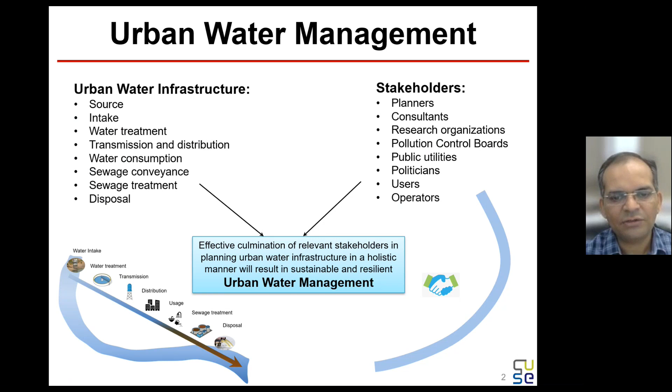Effective culmination of relevant stakeholders in planning urban water infrastructure in a holistic manner will result in sustainable and resilient urban water management. Because today we need both aspects of sustainability, which encompasses economic feasibility, technical feasibility, environmental feasibility, and also social aspects - that forms the sustainability basis. And then we also need systems which are resilient, which will cater to the emerging challenges posed by climate change.

If you see the current status of sewage generation and treatment in India, some states are doing good on sewage treatment, but their generation of sewage is also very high. For example, in Maharashtra, you can see it is having around 9,000 million liters per day sewage generation, but treatment is around about 7,000 million liters per day.

Whereas some states, because of the topography and current settings, such as Kerala, sewage generation is there, but treatment capacity is very minimal. Also in West Bengal, Tamil Nadu - these are the states which will be catching up with the sewage treatment systems.

In India, on average, we have about 44% sewage treatment capacity, which is based on the recent data issued by the Ministry of Environment, Forest and Climate Change.

We have the challenge of sewage generated, and we have to create treatment facilities. Now time has come to think of these not just as treatment facilities, but as new sources of water. Our treatment facility should also be providing some kind of water for secondary purposes, at least to start with. Then we have the industrial wastewater problem, which can be tackled separately or in an integrated manner in common effluent treatment plants. So overall, the sewage and industrial treatment is a challenge in India currently.

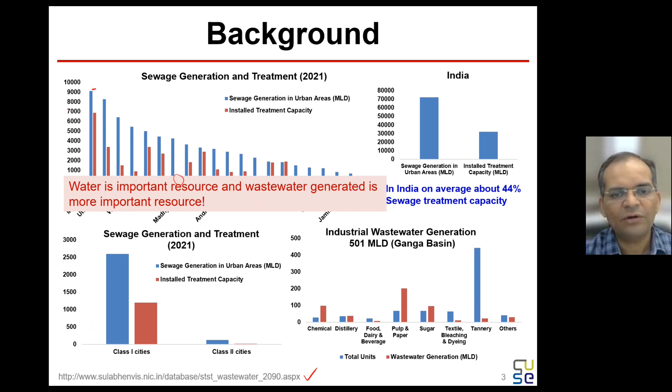We have been studying water as an important resource, but currently, wastewater generated is a more important resource because of the carbon, nitrogen, phosphorus available in this wastewater. So we'll see in this talk how these are very important. These are the approaches for wastewater management.

If you talk about how we can move from that generated sewage scenario to creating this facility, we have different standards - for example, historically we have been following a 30 milligram per liter BOD standard, but recently the Honorable National Green Tribunal has issued an order to bring down the discharge standard to 10 milligram per liter BOD. So now the challenge is we have to bring the older systems to this newer standard, and also new sewage treatment facilities must also meet this 10 milligram per liter BOD standard.

One of the major approaches that can be applied is prevention and conservation, where reduction in water consumption will reduce the generated wastewater and sewage. So reducing consumption through awareness and efficient devices is much more important, but a lot of effort has not been placed on this aspect. Directly, the basic approach in all the missions and programs we see is for treatment, and now people are talking about recycling, and then we'll go for recovery.

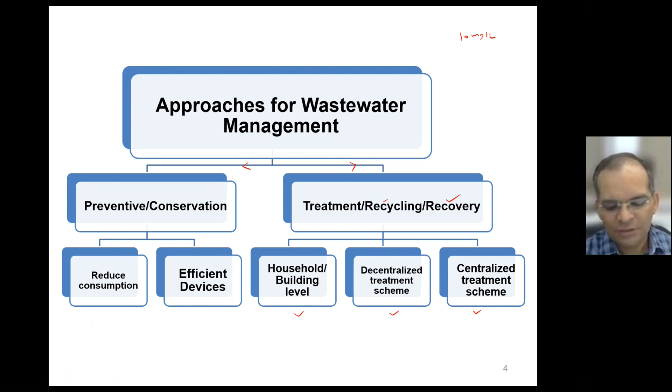So basically we will see how this hierarchy can be addressed, and treatment can be at the household or building level, or at the decentralized treatment schemes, or at the centralized treatment systems. And we'll see the problems in this different level of treatment systems.

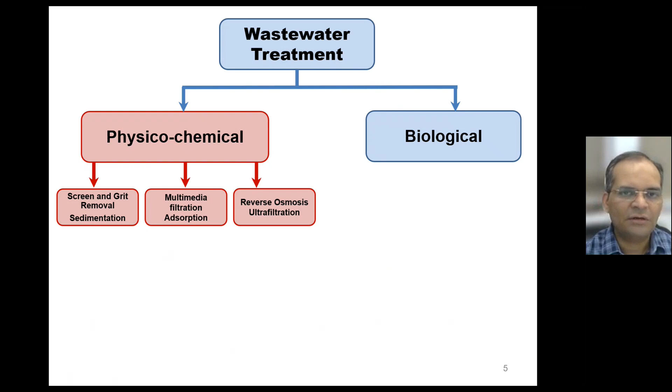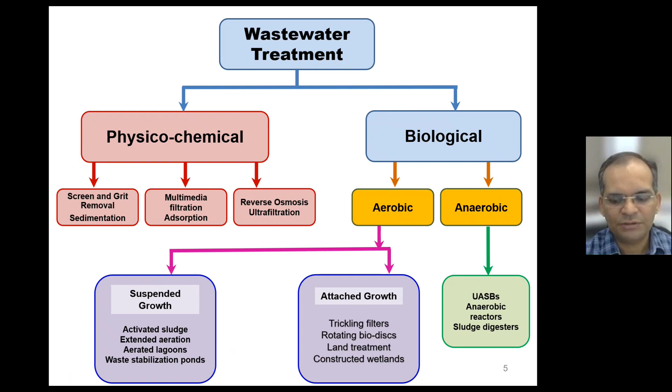Number of treatment technologies exist, and in this talk I'm not going to introduce these particular technologies. You can refer to any other course or material. Broadly these are classified as physicochemical or biological, where physical and chemical forces are applied - filtration, reverse osmosis. Or biological, aerobic and anaerobic, which are UASBs and other reactors. Then suspended growth, ASP, SBR, extended aeration. Attached growth, trickling filter. So an arena of technologies exist, and we can form a treatment chain to bring down the required amount of pollution level, BOD level, by using this combination of processes and operations.

We have been doing this historically. We have seen sewage treatment is being done, but what's wrong with the current approach needs to be understood from a very holistic perspective of life cycle thinking.

So basically, if you see, this particular is your city boundary or urban area, where households are consuming water, food, detergents and chemicals, and the generated wastewater is basically treated in the centralized treatment facility, where lot of times treatment plants are not functioning well. So effluent carries carbon, nitrogen, phosphorus, potash, and energy gets wasted. Also in the sewage sludge, a lot of these nutrients are there.

So the food is being basically produced from agriculture, and from agriculture we have nitrogen, phosphorus, and potash applied from industrial factories - artificial fertilizers. For example, in India we have around 33 or 34 million tons of urea consumed per year, which requires huge amount of energy to fix. So basically for producing these artificial fertilizers, what we are doing is fixing nitrogen to produce this urea, and that is applied to agriculture.

The agriculture is basically supplying this to the food system, and food is getting consumed, and through our excreta, again the nitrogen and phosphorus is getting mixed in the water. What we are doing is again putting lot of energy for sewage treatment, and again taking out this nitrogen. So basically we are not completely optimizing our urban metabolic system. We are consuming artificial fertilizers by fixing the nitrogen, and again we are taking out the nitrogen - in both ways, both times, putting lot of energy, emitting huge amount of carbon dioxide.

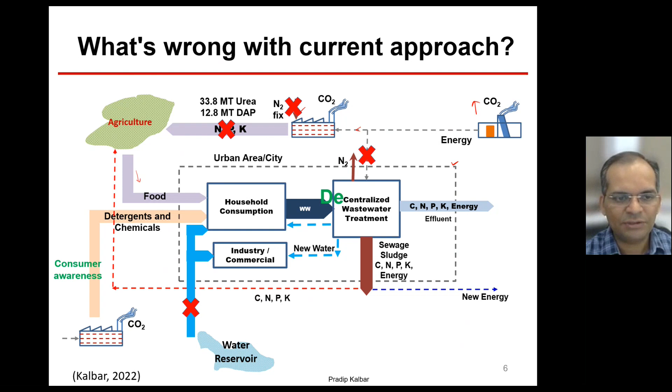And this is all possible from decentralized treatment systems, and why I will explain in some time. So we have to work on consumer awareness as well, to reduce detergents and chemicals which are emerging contaminants and pollutants. So basically we have a lot of opportunities to close these loops and produce carbon, nitrogen, phosphorus from available supply chains.

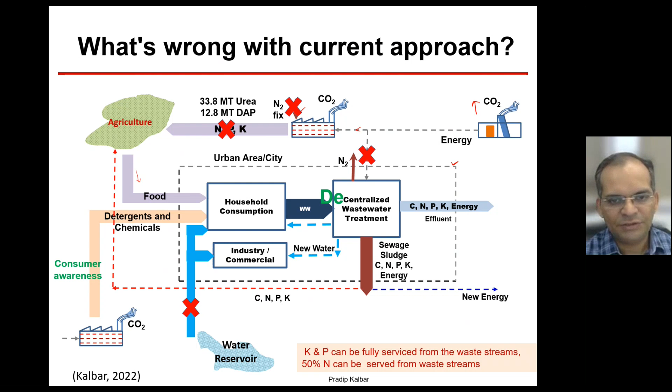So if you see the centralized and decentralized system - centralized is where everything is taken out of the city. For example, wastewater is collected using gravity and taken out from the city boundary, and then it is treated. But what happens is this will basically be wasted or disposed into rivers or nearby ambient water bodies. But if you want to recycle, you have to again lay back the entire redistribution network.

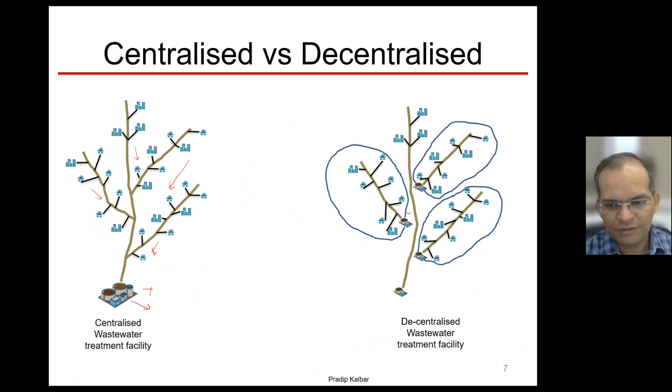Whereas decentralized systems - I'm not saying at the building or very small systems, but optimally scaled decentralized systems are very important to plan. These can be localized - not at the building level or household level, but at some community level, some neighborhood level systems will be very, very viable. Instead of creating a huge system at one point, at one place, you can create such smaller systems, and the redistribution network cost can be optimized. So this is the major difference between the centralized and decentralized treatment systems.

So too small systems are difficult to operate and govern. Hence I'm not saying decentralization means very local, very small systems - those do not offer scale of economy. So highly centralized systems place challenges in recycling treated effluent and sludge, and there is no scale of economy beyond one point.

And additionally, flat terrains require deeper sewage networks. So basically we have the challenges of highly centralized systems and highly decentralized systems.

Currently, consultants, contractors, and politicians prefer the comfort zone of a highly centralized system: one DPR for one city, so that the entire money can be taken out of the system in one go. That is the comfort zone for many stakeholders.

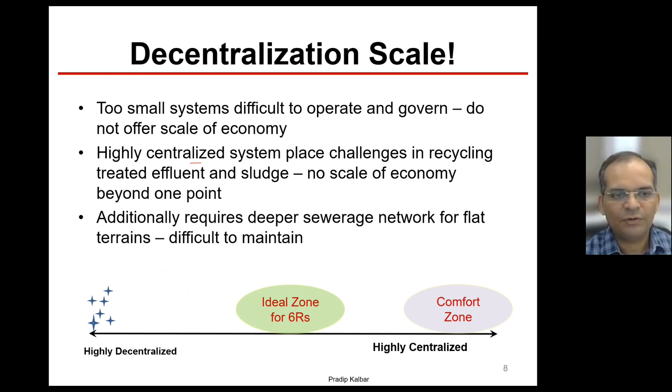There are also highly decentralized solutions promoted by some organizations, where scale of economy is lost. So the ideal zone for recycling, reuse, and recovery is somewhere in between, and that scale needs to be identified for each city separately through detailed feasibility studies. Scale is more important than solution here for successful sewage treatment.

So what I'm trying to say is we need a sustainability and resilience perspective for emerging urban water management challenges. Rational urban development can be achieved when both aspects are taken into account: sustainability, where water infrastructure is affordable, acceptable, environmentally prudent, and relevant for a given location, with social aspects taken care of; and resilience, which means coping with emergent hazards related to climate change. Even if the system fails, it should reboot in a very fast manner.

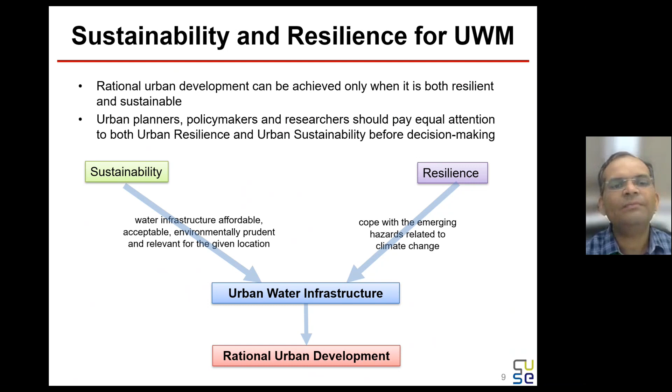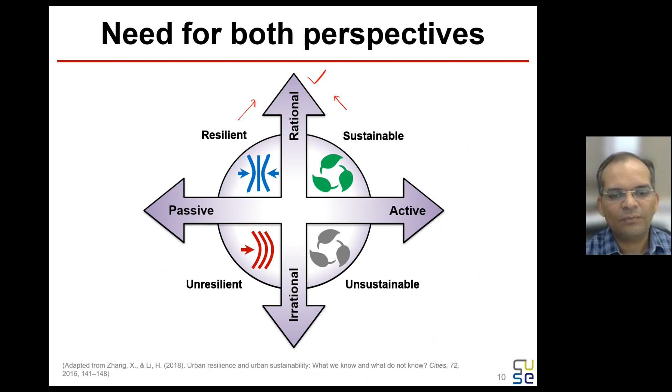That is the urban water infrastructure which will lead to rational urban development, and how that is possible through a hybrid treatment system I will discuss now. We need both of these aspects for a rational development where resilience and sustainability are taken into account. Anything not matching this is not a correct or rational development of urban water systems.

This can be achieved using circular economy. Those of you who are not aware of the circular economy concept can refer to this report, which gives a lot of conceptualization. Basically, circular economy is where we want to maintain resources in the same cycles.

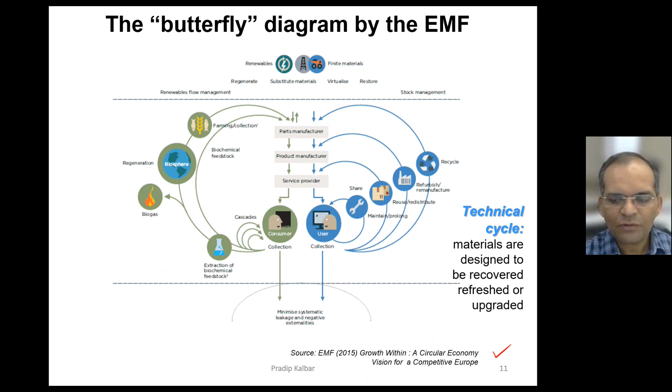We have technical cycles of materials, where materials are designed to be recovered, refreshed, or upgraded, and biological cycles, where materials are meant to be returned to the soil through composting or anaerobic digestion. So we are basically trying to close the loops of all the technical and natural materials that we use.

Conceptually, the term is circular economy because you need a lot of stakeholders to come together to make this happen. We need to bring economic changes to achieve circularity of resources—hence the term circular economy is coined.

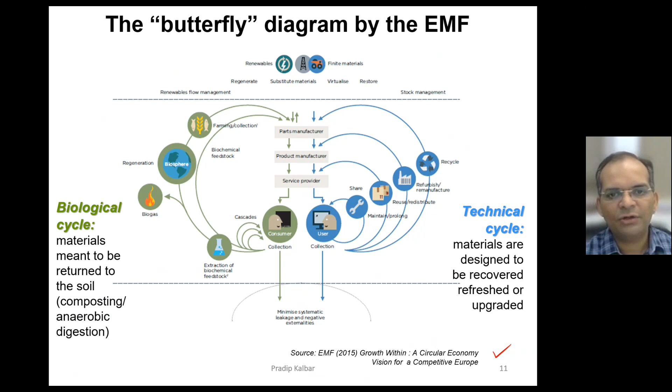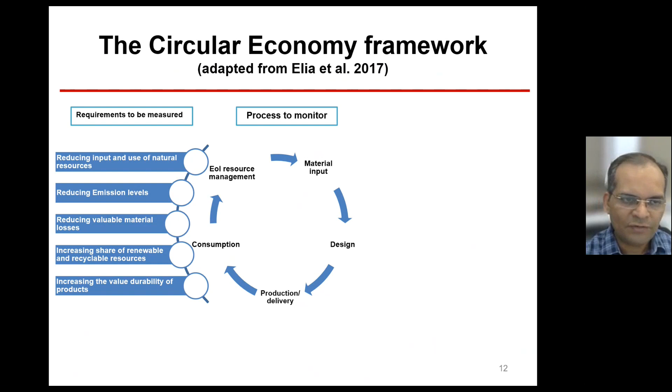In the context of circular economy for water, we have to monitor all the processes: what is going into the system, how we are designing, how we are consuming, and the different requirements to be measured and actions involved. For example, for the water cycle: energy and chemicals consumed, effluent quality, carbon, nitrogen, phosphorus, biogas, and avoided emissions.

These need to be measured for designing the circular economy for water, and the actions involved relate to what kind of business models and what kind of cascading is possible. Implementation can be at the macro level for the entire city, some sub-zone, or a small zone.

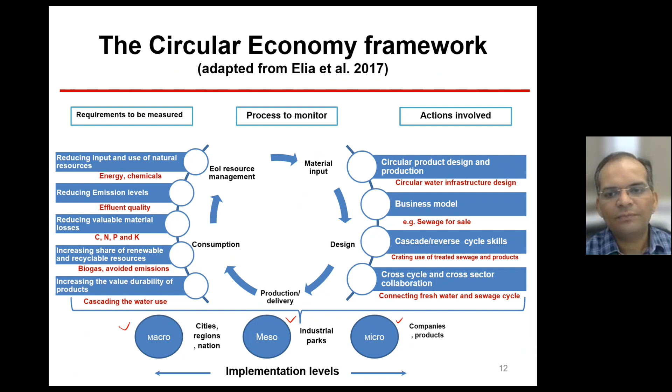These are some examples of actions involved for sewage treatment. For example, extracting cascaded value—a process of extracting value at a series of stages, beginning with high value products and moving to lower value products.

Closed loop water systems can be full or partial and work at all scales—for example, city scale, with Singapore as one example, industrial scale, building scale, or product scale. So you can apply this circular economy framework at different levels.

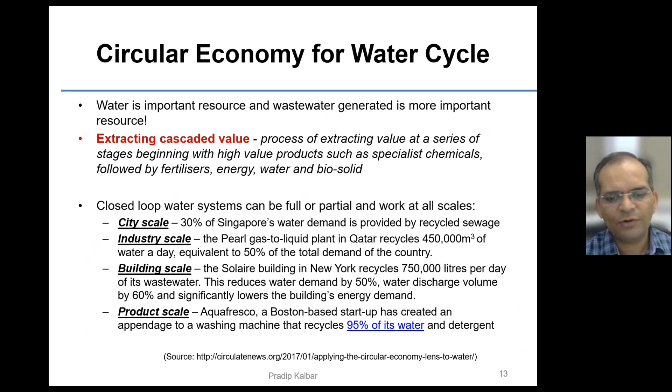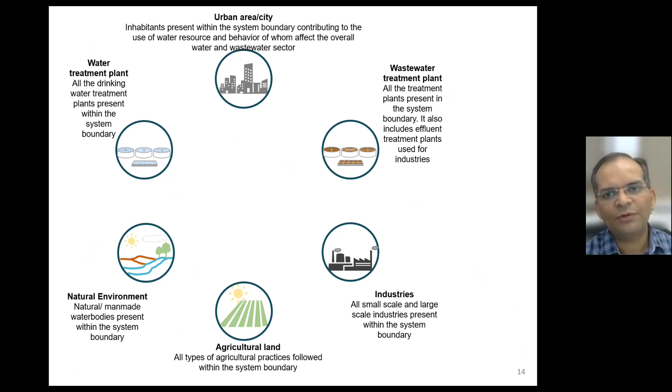We have studied the circular economy for water in a very in-depth manner, classifying water into six compartments: natural environment, water treatment plant, urban area, wastewater treatment plant, industries, and agricultural land. This is a system boundary where drinking water is extracted from natural resources and supplied for different purposes, or irrigation water.

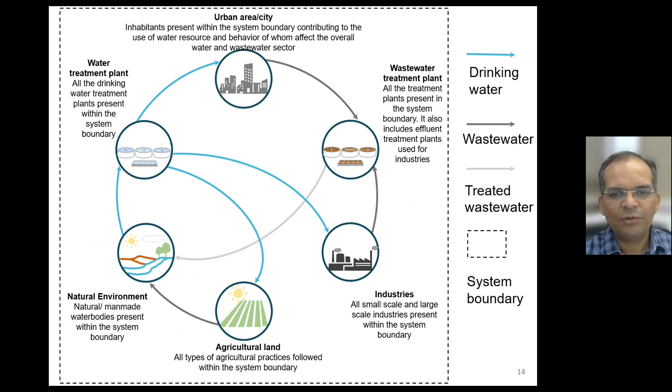Then the wastewater generated from all these users, treated or untreated, goes back to the natural environment. So currently what is happening is cities are using water from freshwater resources and dumping it without treatment or partially treated into the same resources, and downstream cities or habitations are getting affected.

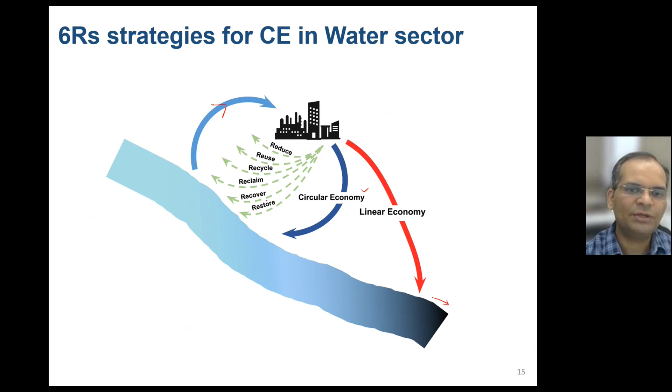So we need to enable this circular economy so that reduce, reuse, recycle, reclaim, recover and restore can be achieved. This is possible when we first put effort on reducing water consumption in industries, agricultural areas, and housing areas. If we work on reduction, that is the first and easiest solution.

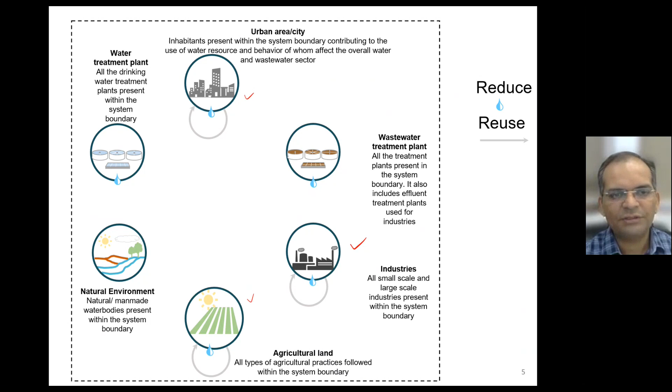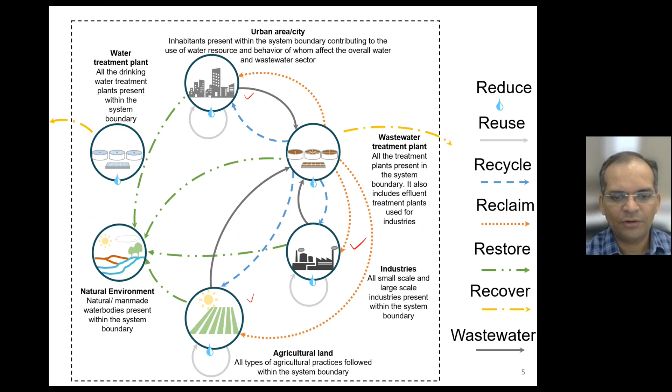Then reusing itself in the irrigation system, industrial system, cities; recycling, treating the water and using it again; reclaiming - cities' water can be reclaimed for industries or for agriculture. Restoring - any additional treated water can be restored using managed aquifer recharge. And recovering nitrogen, phosphorus and other nutrients is recovery.

So we have to work towards developing these 6R strategies, and this detailed discussion and scientific work is available in this particular paper, which I will share the link to in the YouTube description.

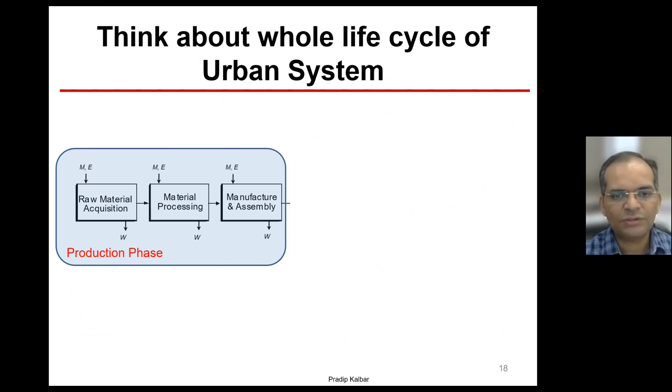So basically, whatever problem we are discussing, we have to think about the production phase of resources - where the resources come from, how we use them, and how we dispose of them. So: end of life, use phase, reuse, remanufacture, closed loop recycle, and open loop recycle. This is called life cycle thinking.

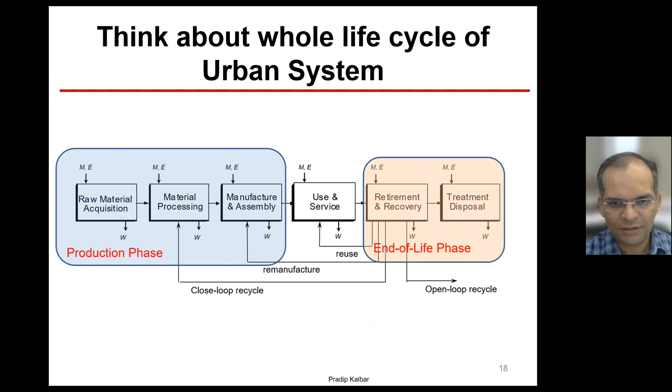We have to apply this for water systems as well. Using life cycle thinking and circular economy, we have to take the decisions.

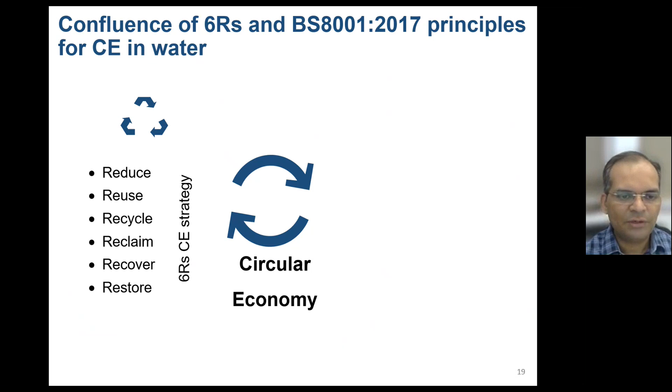So this 6R strategy needs to be coupled with the 6 BS8001 principles of system thinking, value optimization, innovation, collaboration, stewardship, and transparency. So our paper gives a very detailed idea about how this can be coupled to achieve the circular economy.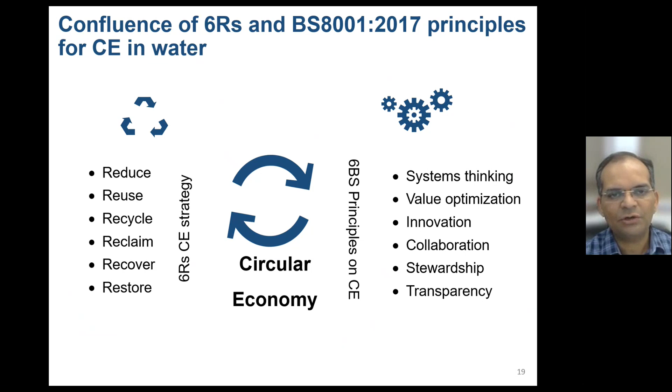Now, with this background of systemic thinking, what are the challenges in creating sewage infrastructure? Because this kind of thinking has not gone into developing our sewerage systems and treatment systems. So a gap exists between sewage generation and wastewater treatment, as I showed in the first slide.

We have mechanized treatment systems, which most people working in the water sector know, such as activated sludge process, membrane bioreactors, SBRs, which have significant high energy consumption and result in very high operation and maintenance cost. Whereas there is a class of natural treatment systems such as phytoremediation, constructed wetlands being one example, bioremediation, zoo remediation, and combined treatment.

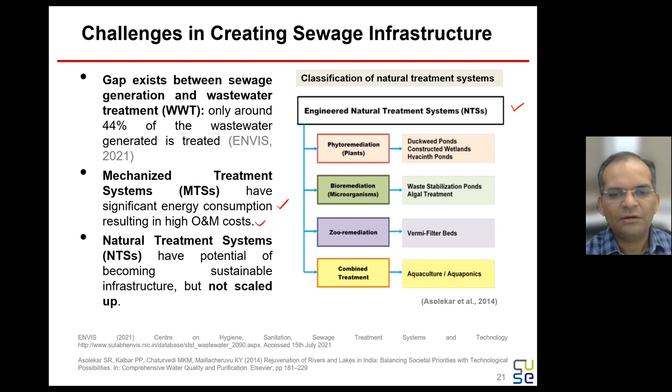Basically, these treatment systems are available options which do not consume a lot of energy, but they are land-based treatment. So we have a trade-off between these technologies - one is mechanized treatment system, and the other is natural treatment system. This trade-off needs to be understood, and then an appropriate strategy needs to be developed.

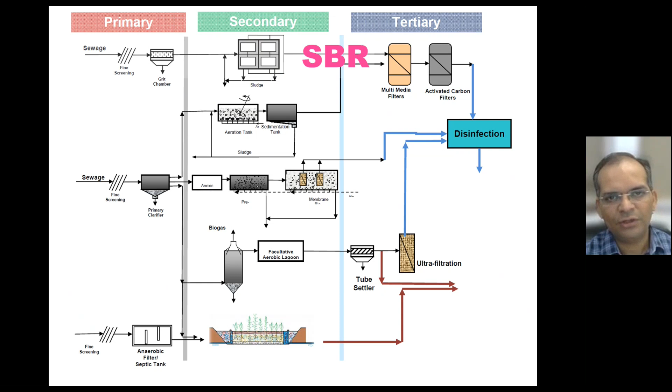So our treatment goal should decide the treatment technology chain. For example, whether you want SBR, activated sludge process, MBR, UASB, or constructed wetland - what is your end goal? Whether you want to use it for high grade applications or for land irrigation. So what I see in a lot of public government tenders is no mention of the end use.

Instead, a direct technology is specified, one particular technology specified, which is not correct practice. Instead of specifying the technology, what needs to be specified is the end use and the expected quality parameters and performance guarantee by the technology provider. Whichever technology they want to go for, they can go for.

You can fix the per year operation and maintenance cost, or you can fix the net present worth for 30 years - whatever quantitative criteria you want to use - but don't specify any particular technology, or specify all the technologies so that all technology evaluation can be done.

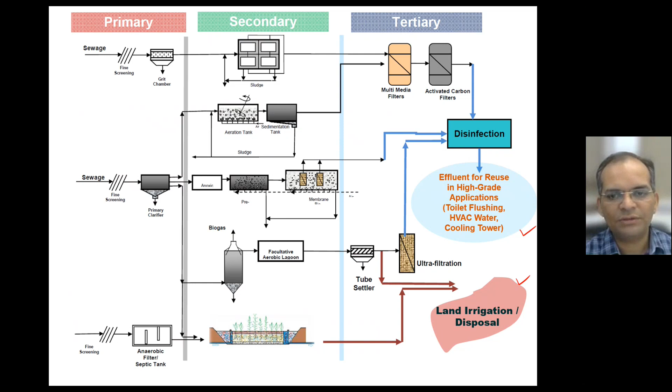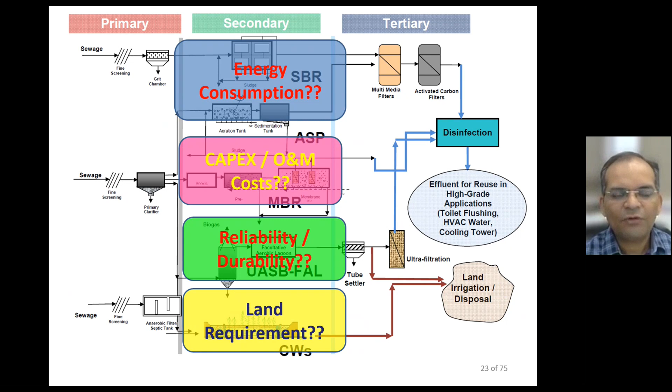So basically, we have varied energy consumption, varied capex and operation maintenance cost, varied reliability and durability, and varied land requirement. These are the number of criteria which can be used for the bidding process while evaluating the treatment systems. If you see the graph of operation and maintenance cost and land requirement, these are the primarily major criteria.

Because capital cost can be arranged by third-party funding agencies, such as many multilateral agencies, which will fund the capital investment anyway. The issue is, after the capital expenditure happens, how the treatment system can sustain for the next 30 years is the question not being discussed again and again. So we have to worry about operation and maintenance more than getting something implemented.

Okay, so on the x-axis, what I plotted is the BOD that is decreasing, outlet BOD. So it's a little bit a tricky graph, not a conventional graph. On the y-axis, I have plotted the operation and maintenance cost in rupees per meter cube. If you see this MTS, the brown graph, it grows steadily, linearly, but as more stringent standards need to be met, the higher the cost and higher the energy required.

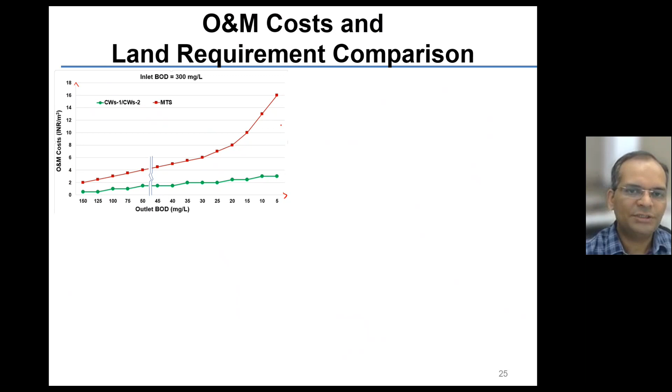Hence, the operation maintenance cost shoots up very rapidly. Whereas natural treatment systems such as constructed wetlands are plotted where energy required is very low, operation maintenance costs are typically stable. So basically, a huge drastic difference is there between the operation and maintenance cost.

Whereas if you see the land required for natural treatment systems is very high, whereas for the mechanized treatment system, land requirement is very low. So there is a clear trade-off between these two treatment systems, mechanized treatment systems and natural treatment systems.

So at the BOD 30 level, this graph becomes exponential, where we have to shift from mechanized treatment system to this particular natural treatment system. So basically, which will reduce the operation maintenance cost and also reduce the overall land consumption.

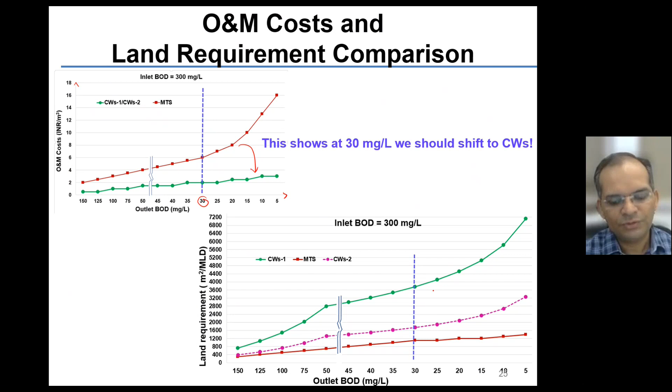So what I'm proposing is to use the hybrid treatment system approach where mechanized treatment system can be used for a chunk of the pollution. So the major part of this pollution can be settled, and with very primary aeration, if required, can be done and no sophisticated technology is needed. So basically you can use simple settling tanks, take out the chunk of the pollution, and then bring down

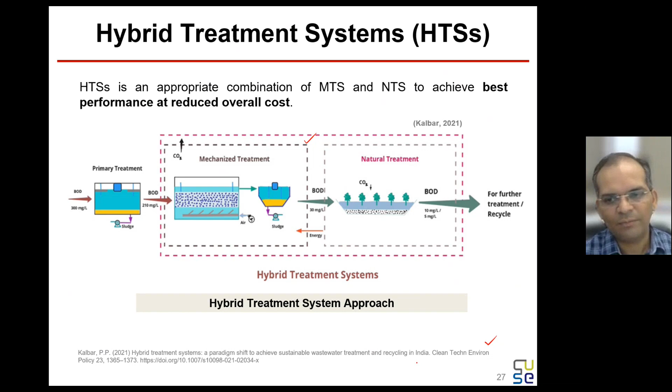the BOD to up to 30 to 40 milligrams per liter, and then shift to the natural treatment system using the available land area. So that is the hybrid treatment system approach, which is given in this particular paper. Complete scientific discussion is available.

So what will happen if we use the hybrid treatment system given here is the operation maintenance cost goes down drastically. So earlier, for let's say 5 milligrams per liter, it was 16 rupees per meter cube, which can be brought down to 6 to 8 rupees per meter cube.

And this 5 milligram per liter BOD treated water can be used for a variety of secondary applications such as toilet flushing, gardening, these kinds of applications are there. And land requirement also, from natural treatment system, goes down to almost half of the original land requirement.

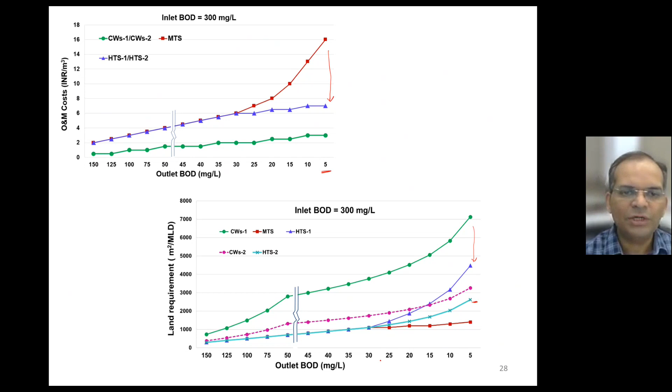So there are different kinds of hybrid treatment systems. You can use deep bed systems, constructed wetlands, which will further bring down the land requirement, or you can use shallow bed. You can refer to the paper where a lot of details are given. So I have given here the numbers of hybrid treatment systems using the shallow bed or deep bed constructed wetlands.

So if you use shallow bed constructed wetlands in a hybrid treatment system, you need around 3000 meter square per MLD of land for achieving a BOD level of 10. And if you want to achieve 5, then you need a little bit more area, around 4000 meter square per MLD.

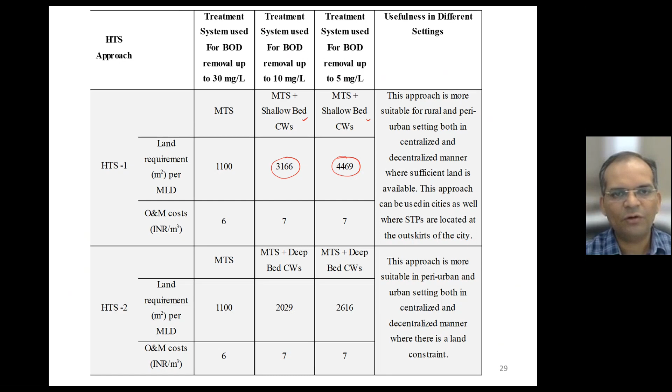So this approach is more suitable for rural and peri-urban settings, both in centralized and decentralized manner, where sufficient land is available. And this can be used in cities as well where STPs are located in the outskirts. So basically we have to take a decision based on the location of the sewage treatment plant, or decentralized planning can be done for making this happen.

If you see the life cycle cost analysis, because now if we are saying okay, what about capital cost, that analysis also I have carried out. If you see in the capital cost, we consider civil works, electromechanical works, and land requirement.

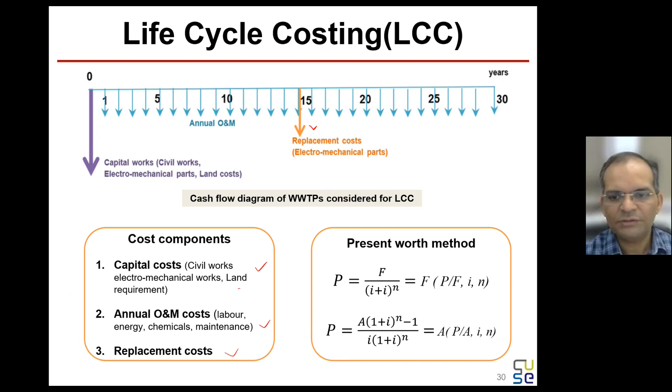Okay, so land requirement is also considered, and annual operation and maintenance costs such as labor, energy, chemicals and maintenance is also considered, and replacement cost after 15 years, because after 15 years we have to replace the pumps, motor and electromechanical components. And we have used, as per IS standards, the present worth method for analyzing different technologies.

What the result shows, and here the land cost I have assumed is rupees 1.6 crores per acre. So basically this is the land cost that I have used. This is typically from the survey I have done, and this is the average cost in, let's say, class one, or typically 1 lakh population cities. So this 1.6 crores per acre cost is the land cost considered.

Even if you consider such a high cost, the life cycle cost of 30 years of operation and maintenance decides which technology we choose. And the analysis shows that in urban settings, even if you use the hybrid treatment system or natural treatment system, it is wise to use the land treatment system instead of any mechanized treatment system, because for 30 years the municipality will end up paying energy bills every year at such a high cost that that money can be invested to purchase the land instead.

That will also save us from a variety of other benefits, such as greening of the place, resilience will be improved, flooding will be reduced, because you are maintaining the land in the city.

So it's a very drastic change in the thinking we have to do, that instead of investing in mechanized treatment systems, we have to invest in natural treatment systems. Even if buying land is required, we have to buy the land. So life cycle cost analysis is very essential.

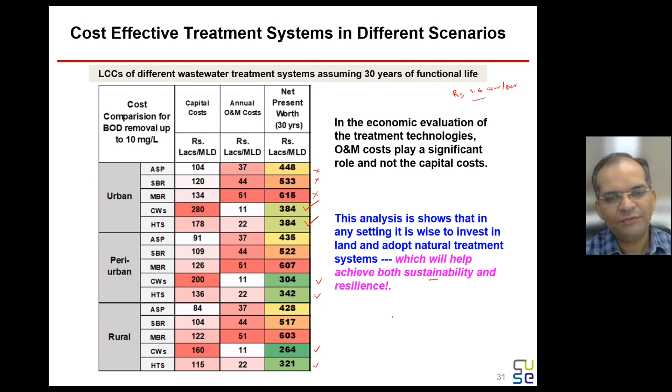Which will help achieve both sustainability and resilience. So those who want to understand this better, the links for the papers and technical details are given. You can redo this analysis and confirm for yourself. Again, I'm saying it is wise to invest in land for the treatment rather than going for a highly mechanized treatment system for the Indian scenario.

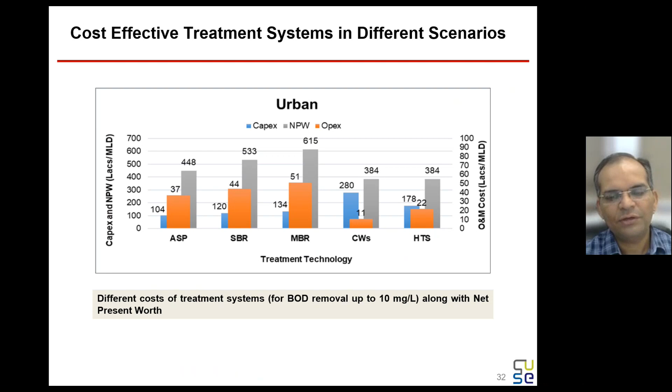So this is the graph which shows the same results, where capex is plotted for different settings. So what is the significance of hybrid treatment systems?

Basically, the National Green Tribunal has ordered that we have to bring down all the treatment systems to 10 milligram per liter level. So first, the older systems have to be upgraded, which can be done using constructed wetlands, and newer systems can be planned as hybrid treatment systems.

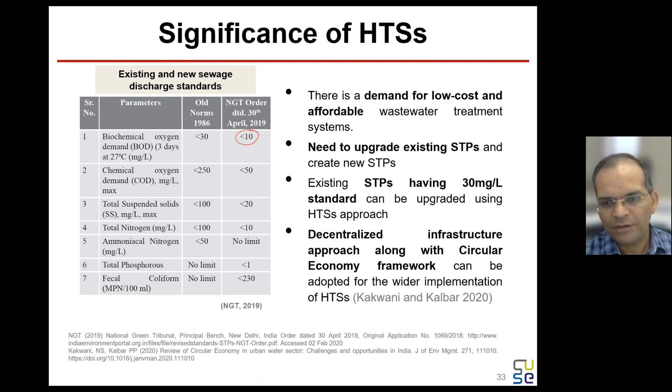So there is a demand for low cost and affordable wastewater treatment systems. There's a need to upgrade existing STPs, and a decentralized infrastructure approach along with a circular economy framework can be adopted for the wider implementation of hybrid treatment systems.

So the additional benefits of hybrid treatment systems are, if the proposed hybrid treatment system approach is implemented throughout India, a total annual energy saving of about 200 gigawatts can be achieved, and 350 gigawatts can be used for future installations. Additionally, this will save carbon emissions and help in climate change mitigation, around 0.45 million tons per year, considering the current India's electricity grid mix.

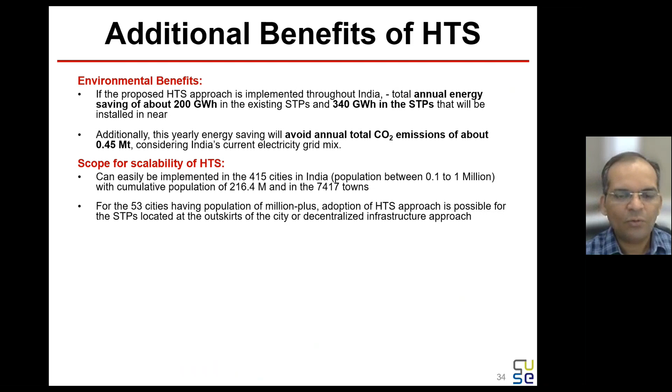And this hybrid treatment system can be easily implemented in around 400 cities, which have populations around 0.1 to 1 million. For other bigger cities, HTS can be used by working with planners and creating land for treatment, or buying land for treatment, using a decentralized infrastructure approach.

So overall, the HTS approach creates jobs for local people, because now we are talking about natural treatment systems. Simple low skilled people can be used for maintenance. There is opportunity to extract resources such as fertilizers and bioplastics, huge supply chains of biomaterials can be created, and revenue generation for operation and maintenance is basically possible.

So HTS adoption will help achieve both sustainability and resilience. That is the whole point I'm trying to make by giving this particular talk. I hope I made my point clear.

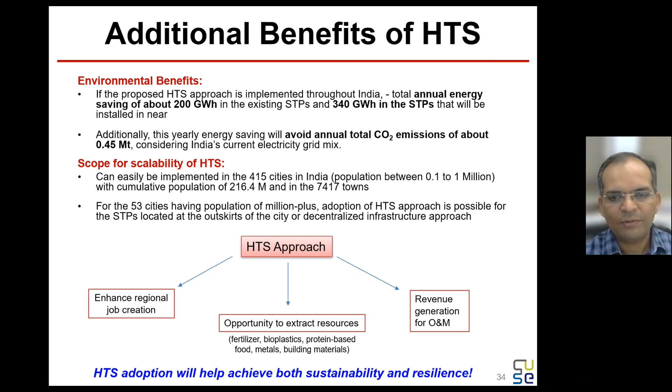So overall recommendation is, constructed wetlands are more suitable for Indian conditions, and constructed wetlands enable sustainable wastewater treatment, and this removes nutrients very effectively. Also, emerging contaminants can be tackled very easily using constructed wetlands.

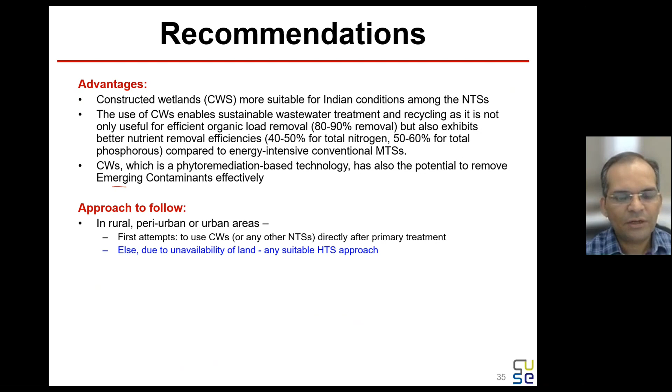So in rural, peri-urban or urban areas, first opt for constructed wetlands or any other natural treatment systems such as duckweed systems or waste stabilization ponds.

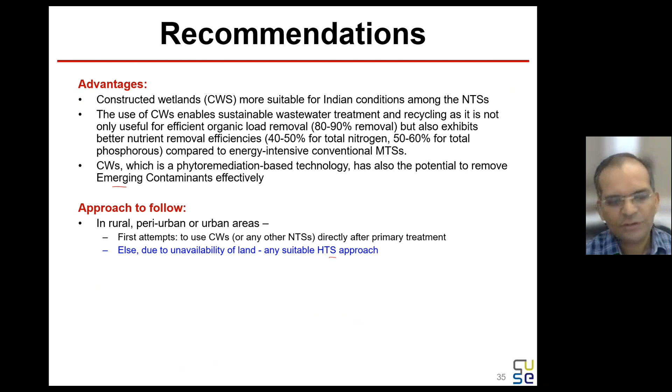And whenever land is not available or land cannot be purchased, then you can go for a hybrid treatment system approach. There are a large number of technology providers of constructed wetlands or other natural treatment systems available. And these natural treatment systems and constructed wetlands have reached maturity, with a number of patents available.

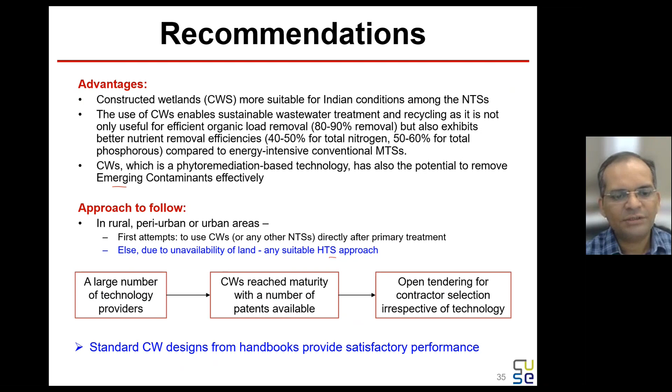So open tendering for contractor selection, irrespective of technology, can be done. Standard constructed wetland design from handbooks can provide satisfactory performance. So you don't need some patented technology or somebody claiming overclaims. That is not required. A simple constructed wetland design based on manuals and textbooks can be adopted.